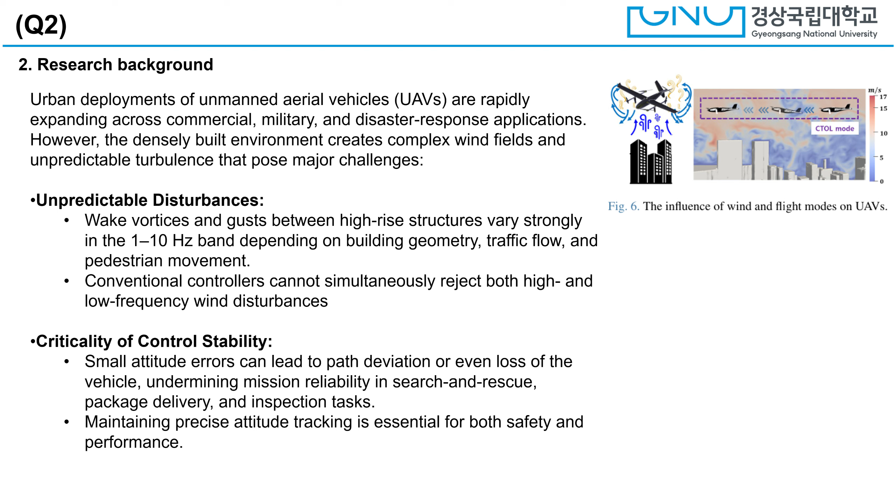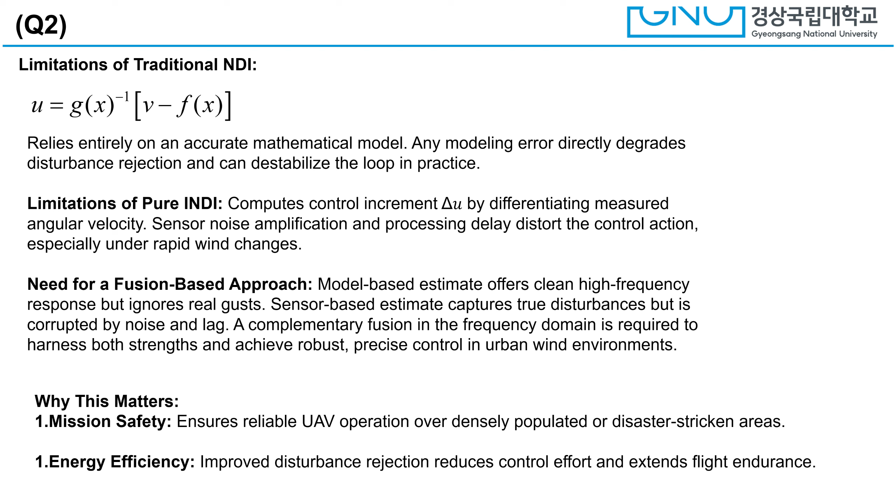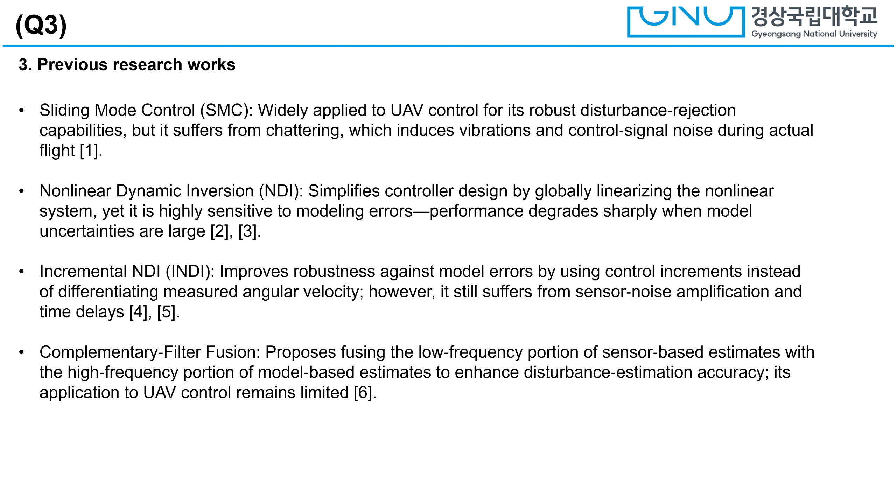So for mission safety and energy efficiency, to improve disturbance rejection and reduce control effort and extend flight endurance. So the previous research works of this paper are sliding mode control (SMC), nonlinear dynamic inversion (NDI), and incremental NDI, also known as INDI, and complementary filter fusion. The references to this information are added to the final page of this PPT slide.

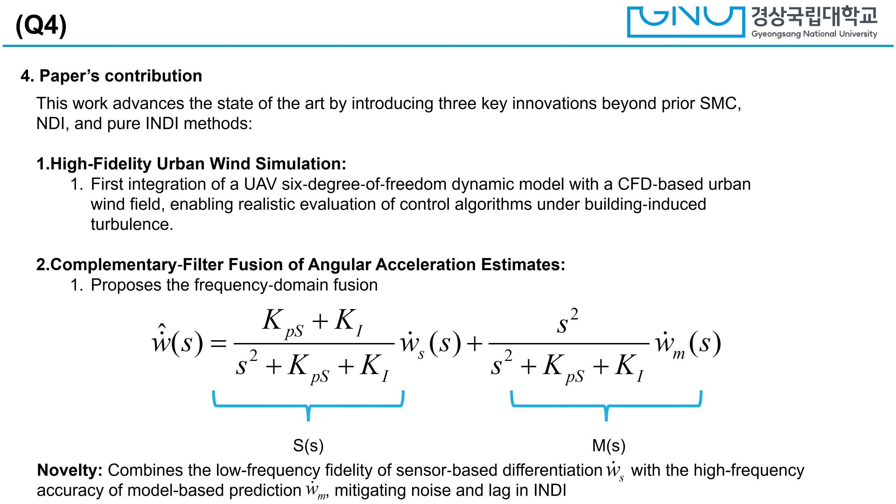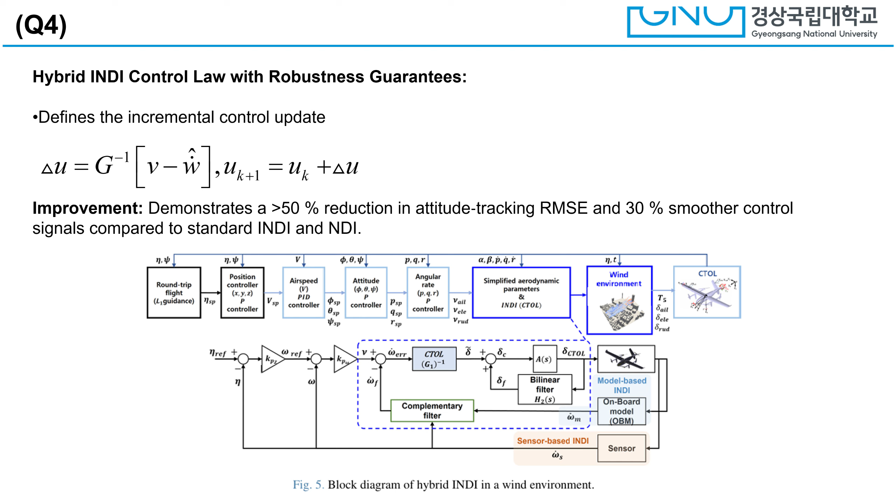The third one is hybrid INDI control law with robust guarantees. This defines the incremental control updates. The same INDI control delta U, and it updates, as you can see, U k+1 equals U k plus delta U. So this demonstrates a 50% reduction in attitude tracking RMSE and 30% smoother control signals compared to standard INDI and NDI. In Fig 5, as you can see, there's a block diagram of hybrid INDI in a wind environment.

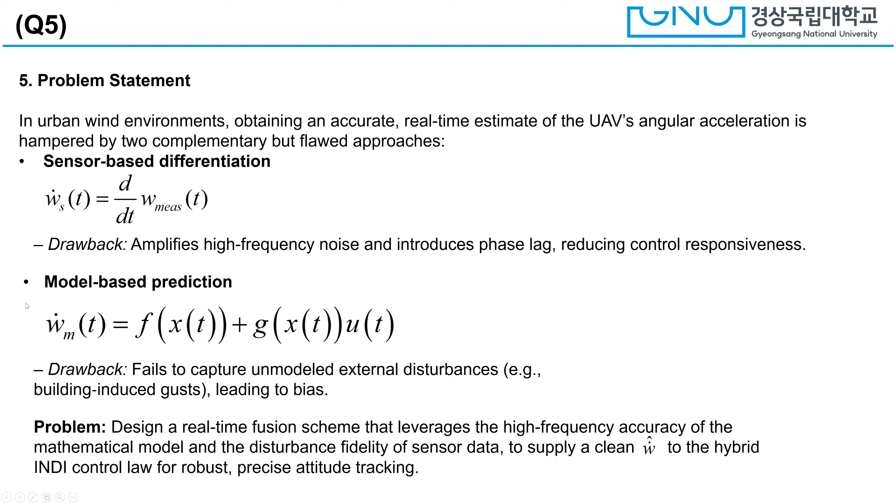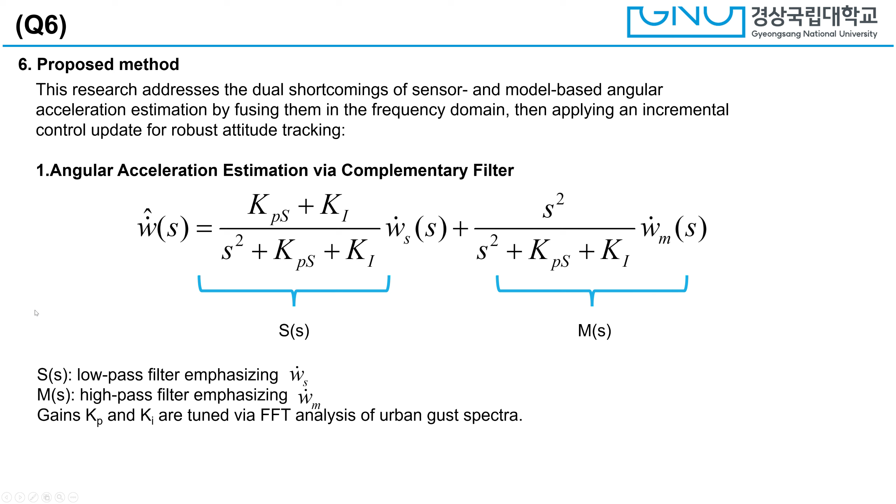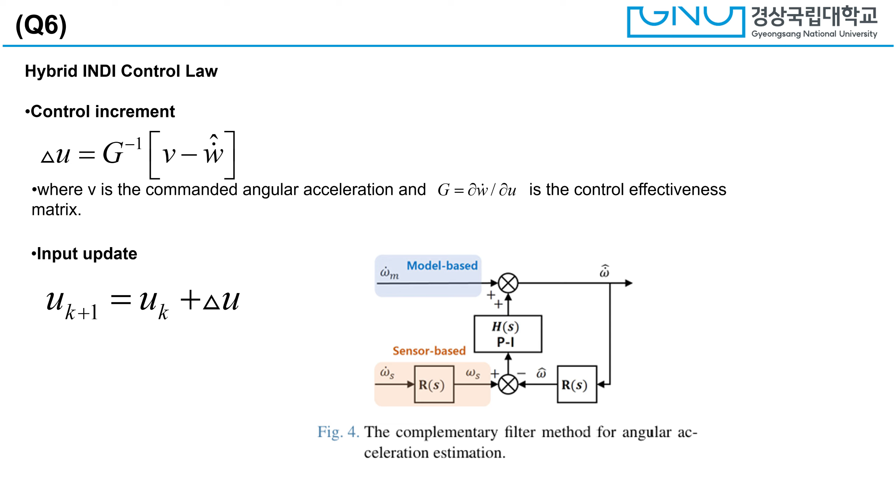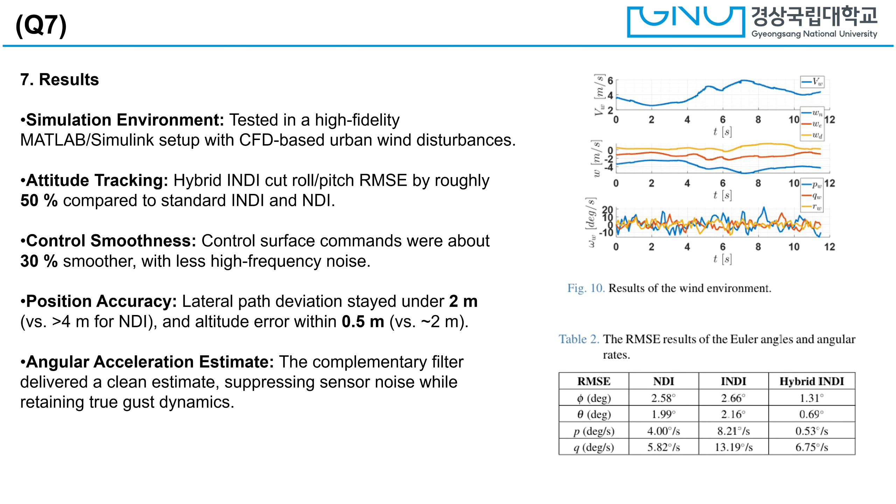So for the results, the original NDI has large oscillations and divergence under gusts, and INDI reduced oscillations but noticeable lags. So the hybrid INDI, which is explained in this research, has rapid convergence with minimal vibration or delay. So overall, the hybrid INDI achieved up to 50% improvement in attitude tracking accuracy and 30% smoother control action compared to standard NDI and INDI, validating its robustness in complex urban wind fields.

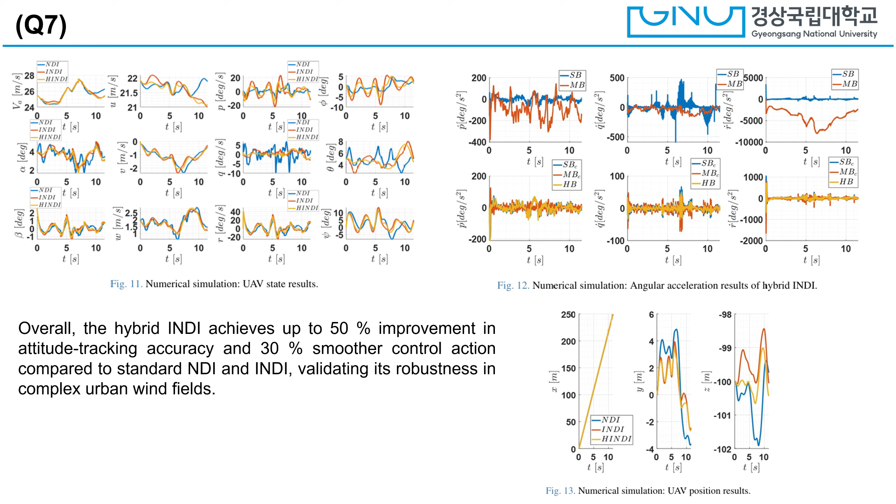So the proposed hybrid INDI method combining sensor and model-based angular acceleration estimates via a complementary filter delivers a clean, accurate W dot hat that neither pure INDI nor NDI can achieve. So this architecture exhibits robust disturbance rejection across both low and high frequency gusts, ensuring reliable UAV operation in complex city environments. So the limitations are that it still requires reasonably accurate onboard models and careful tuning of filter gains.

And the future works integrate online model parameter estimation to further enhance robustness against model uncertainty and extend validation to real flight tests.

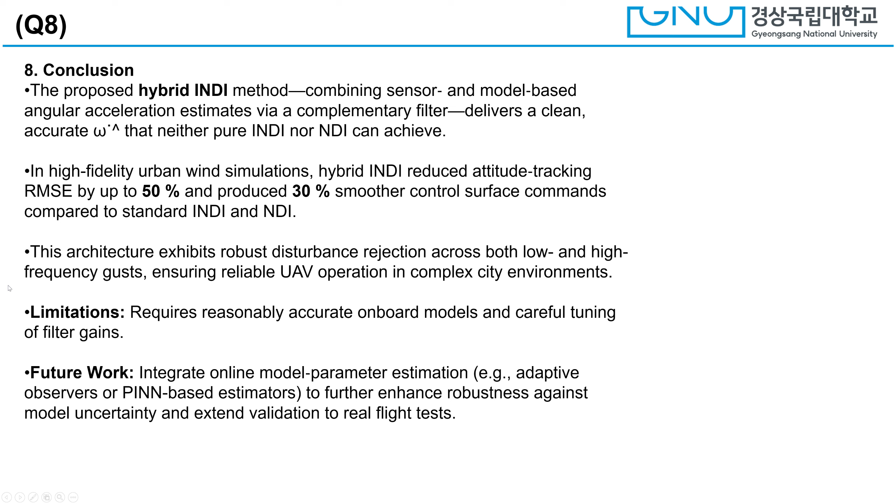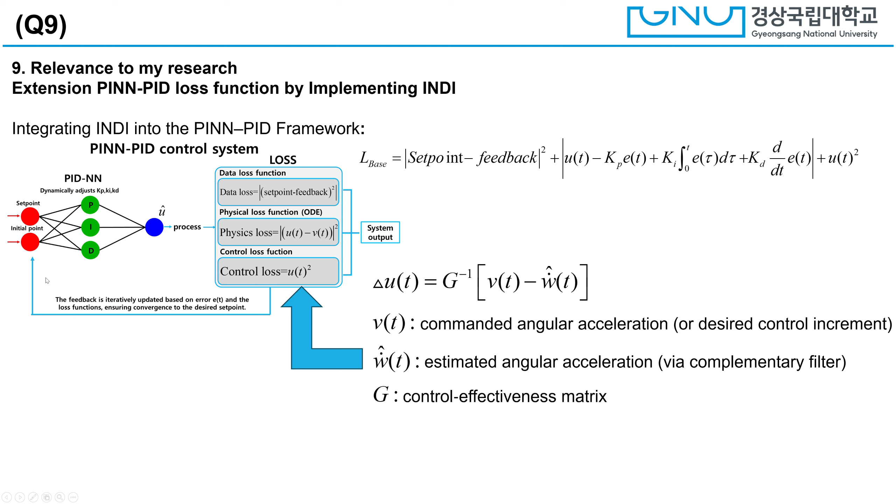So if you can see, I've updated input updates, INDI increment enforcements. So by adding the loss function of INDI and